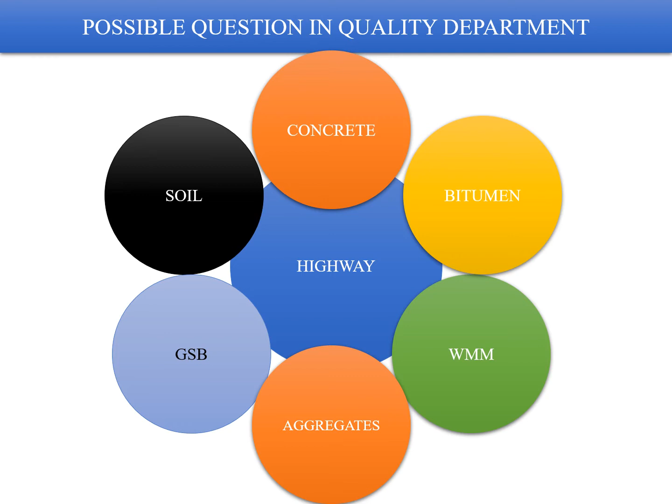Today we will be taking up the possible questions in concrete. This module is mainly divided into 3 parts, each set will have 4 questions in it, and a total of 12 questions will be answered in this module. So to start with the first set, the possible questions in concrete can be: what is concrete?

The very basic questions: What is the role of cement and water in concrete? What is the role of coarse and fine aggregates in concrete? And what is the role of mineral and chemical admixtures in concrete?

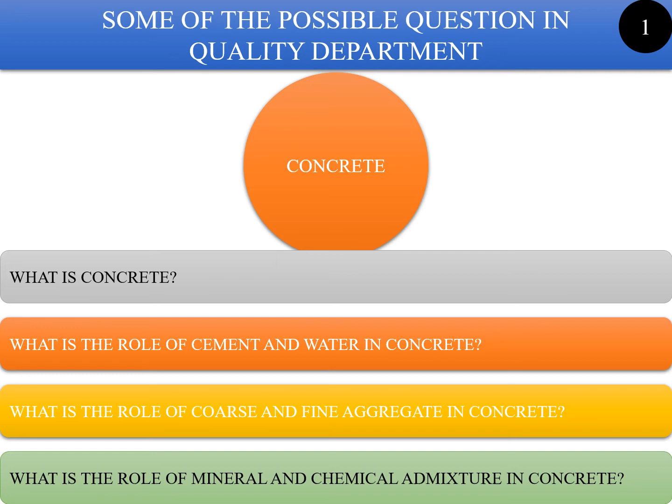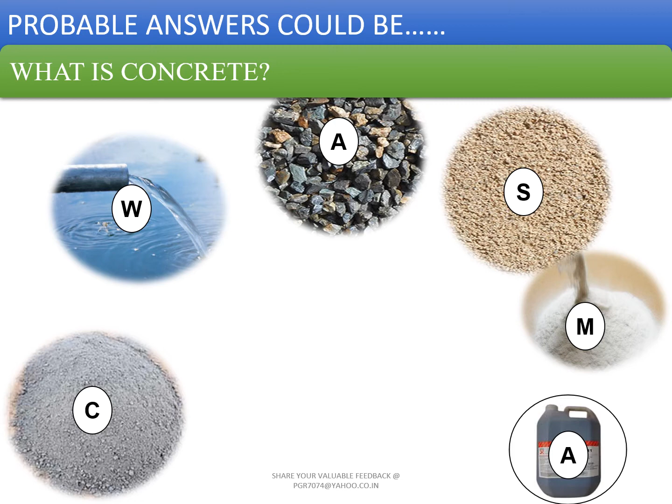Now, what is concrete? Concrete is a mixture of cement, water, aggregate, sand, mineral admixtures, and chemical admixtures. A combination of these will give you a product which is known as concrete.

What is the role of cement and water in concrete? Cement acts as a binder in conjunction with water in the concrete. Typically, cement plays a very important role in order to develop the strength of the concrete.

The water cement ratio plays a vital role in deciding what should be the strength of the concrete. More the water cement ratio, less will be the strength of the concrete.

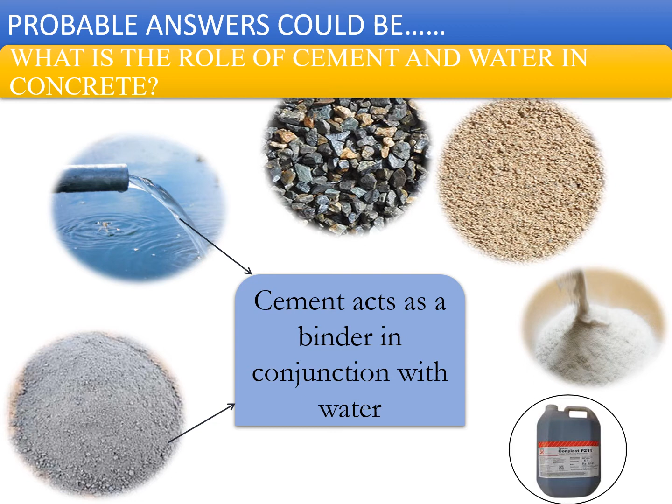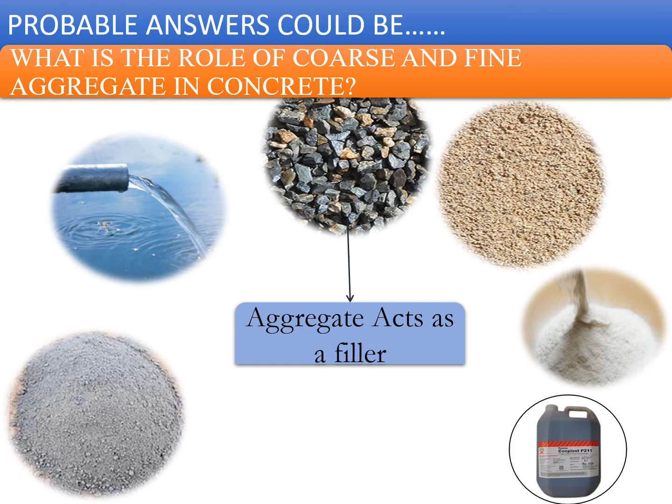What is the role of coarse and fine aggregates in concrete? Aggregates basically act as a filler, and fine aggregate fills up the voids being created in the concrete. So the role of coarse and fine aggregates is to fill the gaps and voids in the concrete.

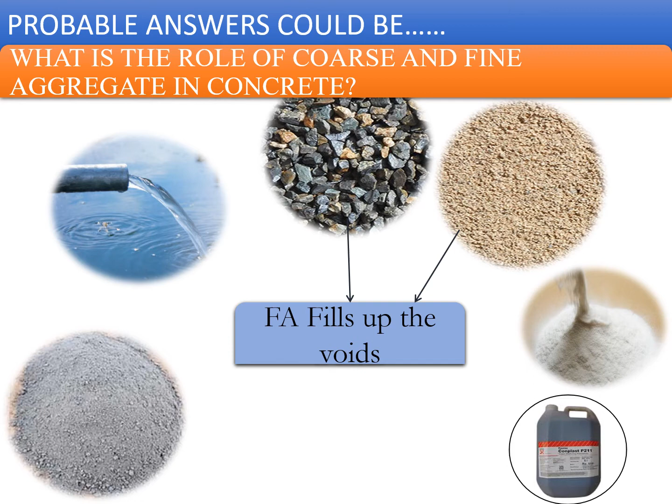What is the role of mineral and chemical admixtures in concrete? The role of mineral admixture is to modify one or more specific properties of concrete, such as strength, durability, especially the RCPT values. By adding the mineral admixtures, you can change the RCPT values and the chloride penetration values of the concrete.

Chemical admixtures are added to modify one or more of the specific properties of concrete, such as workability of the concrete, or sometimes the strength of the concrete.

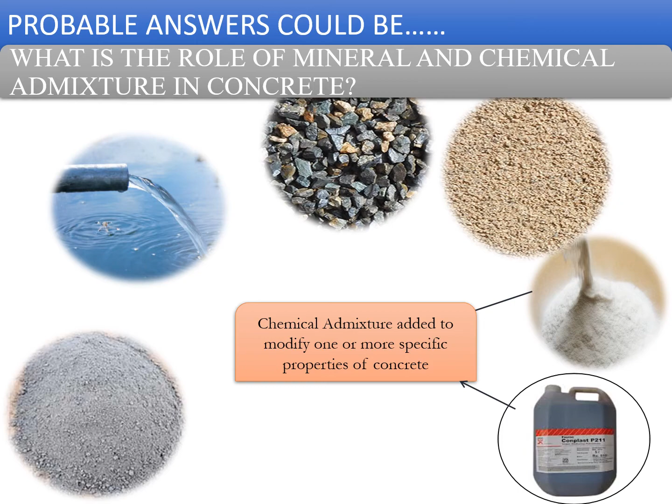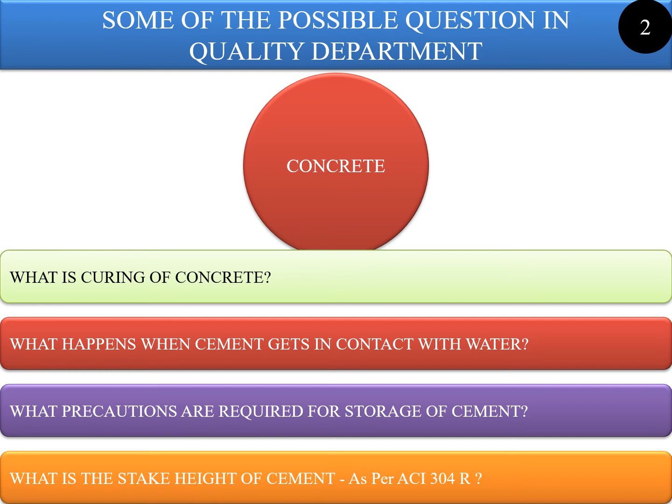In set 2, the possible questions which can be asked are: what is curing of concrete? What happens when cement gets in contact with water? What precautions are required for the storage of the cement? What is the stack height of cement as per ACI 304R?

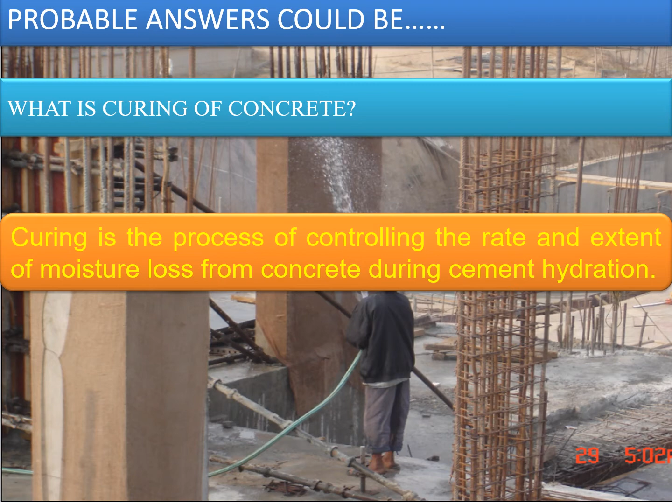What is curing? Curing is the process of controlling the rate and extent of moisture loss from the concrete during the cement hydration process. What happens when cement gets in contact with water?

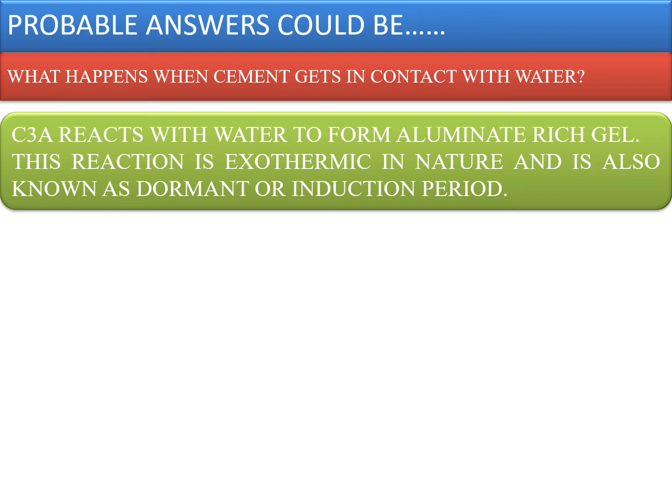C3A reacts with water to form an aluminate-rich gel. This reaction is exothermic in nature and is also known as the dormant or induction period.

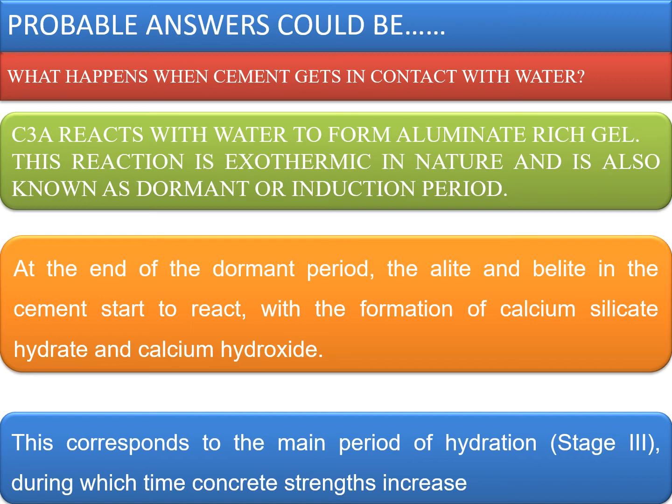At the end of the dormant period, the alite and belite in the cement start to react with the formation of calcium silicate hydrate and calcium hydroxide. This corresponds to stage 3 of hydration, during which the concrete gains strength. In common words, when cement gets in contact with water, an exothermic reaction takes place and a solid mass is generated which gains strength with respect to time.

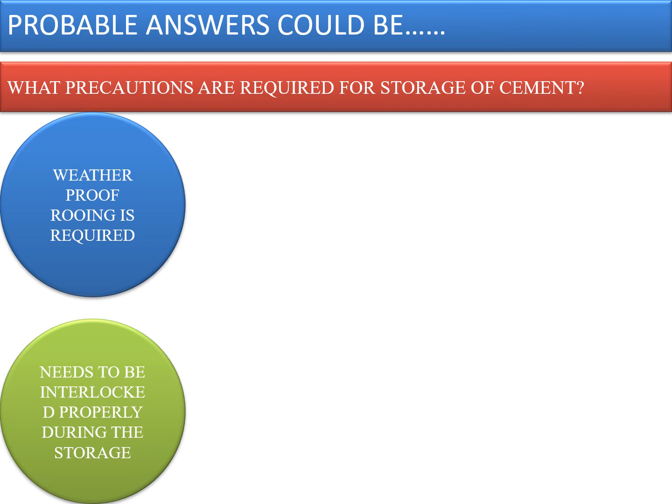What precautions should one take for storage of cement? The shed should be weatherproof with proper roofing, and bags need to be interlocked properly during storage. Height of the stack should not be more than 10 bags as per IS 4082. Bags should be properly covered with a polythene sheet if stored for a longer duration, and toppling should be avoided by properly interlocking them. The type of cement and week number of cement shall be displayed at the storage location or lot where the cement is kept.

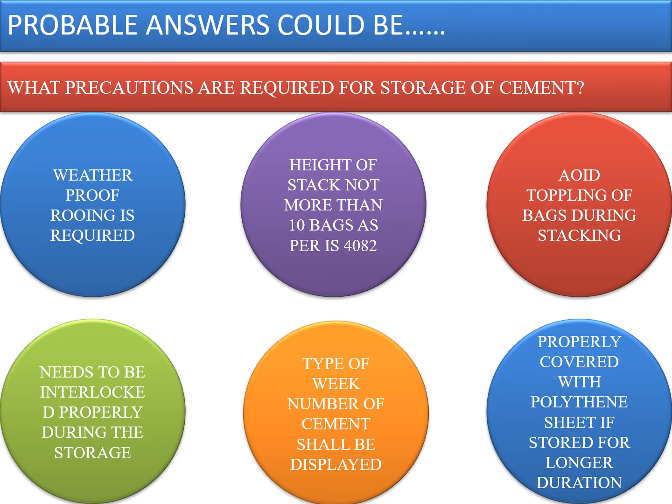What is the stack height of cement as per ACI 304R? As per ACI 304R, cement can be stacked for a period of less than 60 days in 14 layers, and if the storage period is more than 60 days, the stack height should be 7 layers. Whereas as per IS 4082, at any point of time it should not be more than 10 bags or 10 layers in height.

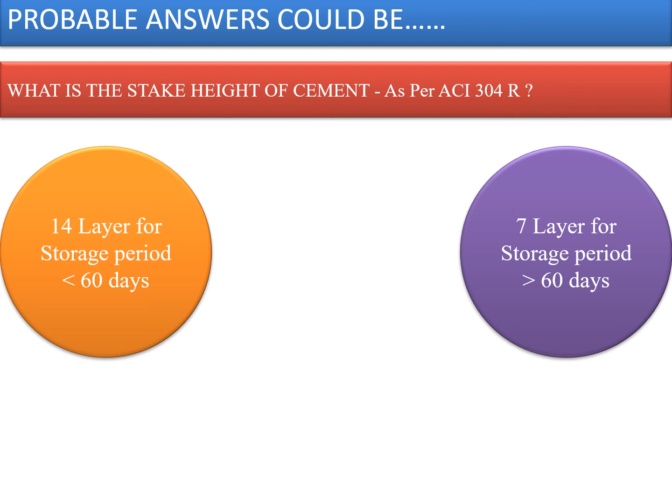Coming to set 3 of the questions on concrete.

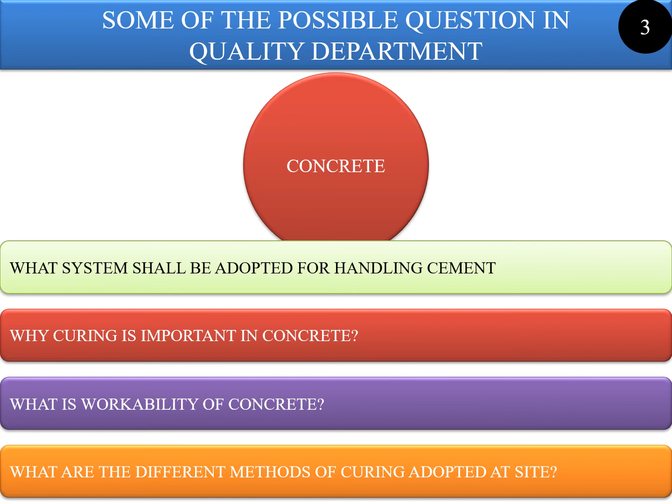What system shall be adopted for handling of cement? Why is curing important in concrete? What is the workability of concrete? What are the different methods of curing adopted at site?

What system shall be adopted for handling of cement? Commonly known as the FIFO system, that is first in, first out. Cement being a shelf life item, it has to be received and issued in a FIFO system, meaning the material which comes first needs to be used first or discharged first.

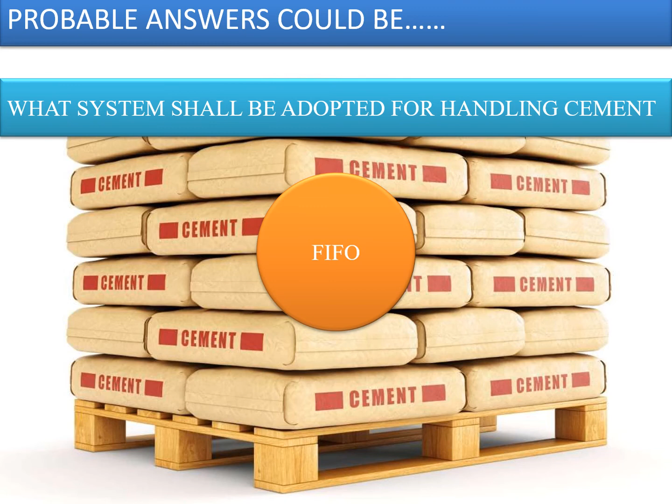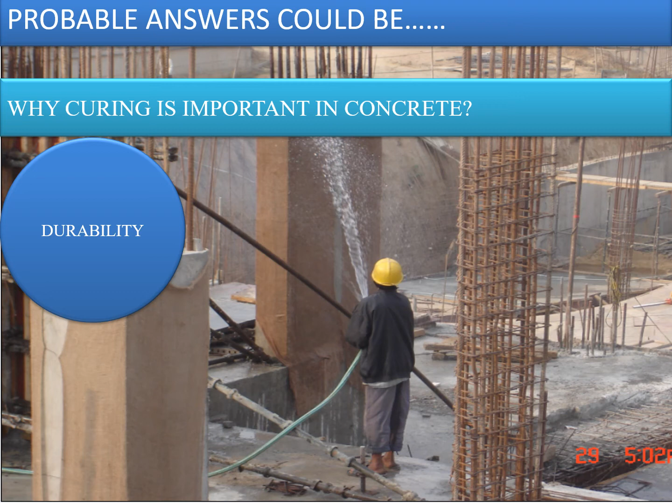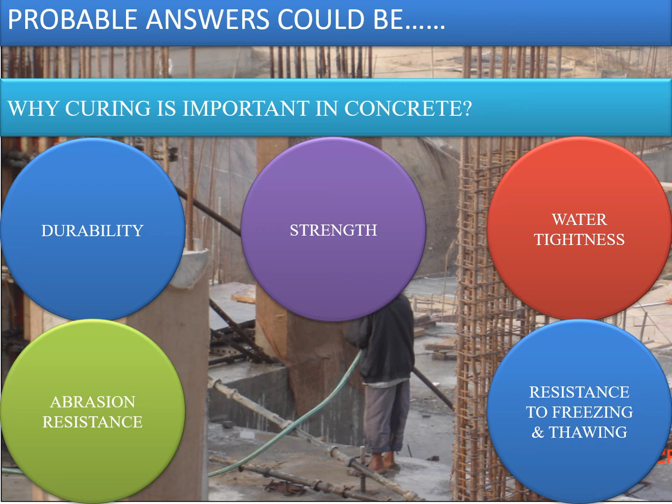Why is curing important in concrete? Curing is important in order to check the durability of the concrete, the abrasion resistance, the strength of the concrete, resistance to freezing and thawing, the water tightness, and also the volume stability of the concrete. So in order to maintain these basic 6 properties, curing is important.

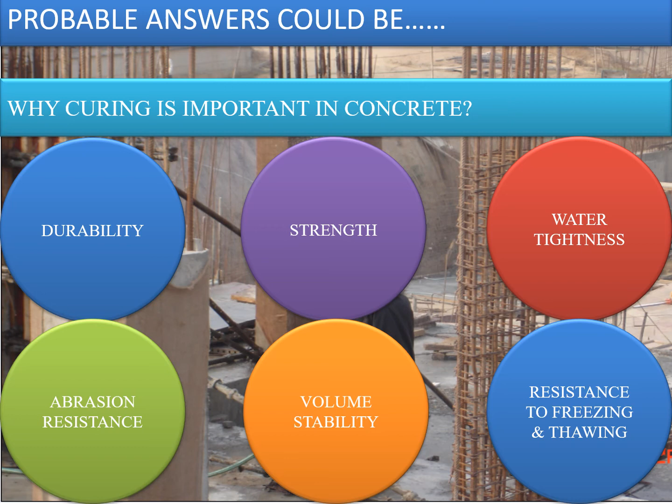Without curing, these properties of concrete will be reduced and the concrete will not be durable. The concrete will have less strength, there will be permeability in the concrete meaning the water tightness will not be there, and the concrete will not be abrasion resistant.

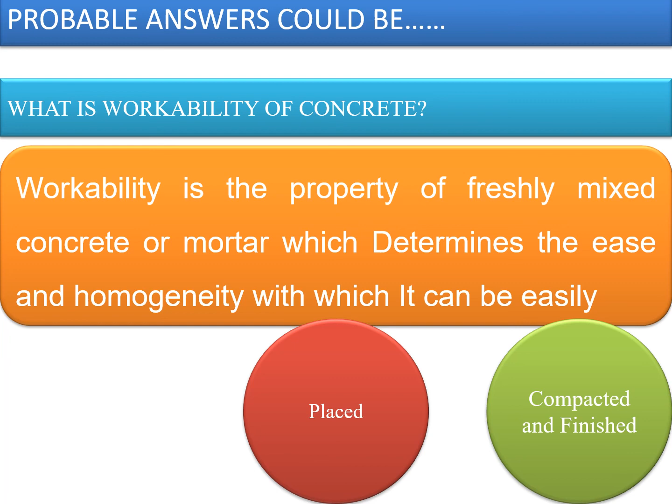What is the workability of concrete? Workability is the property of freshly mixed concrete or mortar which determines the ease and homogeneity with which it can be mixed, placed, compacted, and finished.

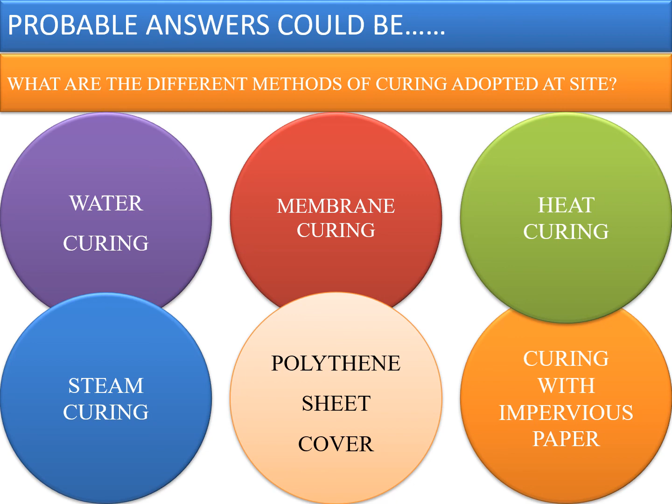What are the different methods of curing adopted at a site? Water curing, steam curing, membrane curing, polythene sheet cover, heat curing, and curing with impervious papers. These are some of the methods which can be adopted for curing of structures at site.

So to hit the bull's eye, once again we should have confidence while attending the interview. We should be intelligent and vigilant enough to understand the question, track it, and divert it in the direction you want, if possible. You should be innovative if stuck on some questions to give a logical answer, and being a civil engineer, you have to be logical.

To summarize this module, we talked about the definition of interviews, and some possible questions in highway engineering related to the quality department specifically, but which may be utilized in other engineering professions. As stated previously, in this module we have 3 sets of questions, and all these 3 sets are on concrete, with some of the possible questions we tried to answer.